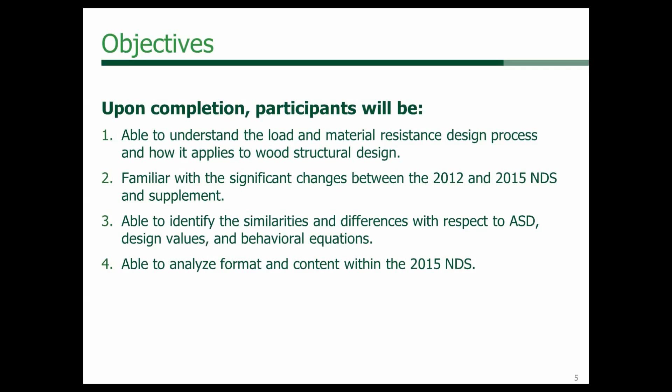Now, the learning objectives today are to be able to understand the load and resistance factor design process and how it applies to wood structural design. We'll become familiar with the changes between the 2012 and the 2015 NDS. And then we'll also look at identifying the similarities and differences with respect to ASD, allowable stress design values, and behavioral equations. And for those of you that aren't familiar with the overall format and content of the NDS, you'll become familiar with that. We'll go through chapter by chapter. And if you've used it before, maybe this will be a review for you, and it'll help you design a little easier with the NDS, becoming more familiar with where everything is.

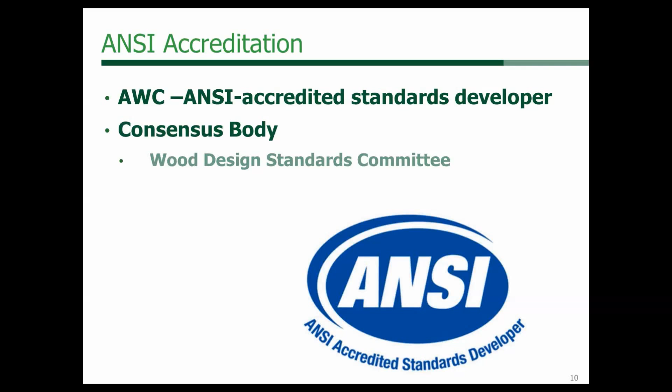The other thing I want to point out is this standard is developed through a standard consensus-based process, and our consensus body is the Wood Design Standards Committee. So this is a very rigorous process where it's not only the wood industry involved with developing the standards, but we have a cross-section of stakeholders that are also involved with the process of developing the standard.

Now looking at the overall format of the actual NDS and the changes from 2012 to 2015: the 2012 NDS is formatted such that chapters 1 through 3 cover general design criteria or general provisions for designing with wood, and then the product chapters—sawn lumber, I-joists, glue lams, structural composite lumber, oriented wood structural panels—are all in the product sections, which are in chapters 4 through 9. Connections are in 10 through 13 in the 2012, then 14 is shear walls and diaphragms, specific loading is in 15, and fire design is in chapter 16.

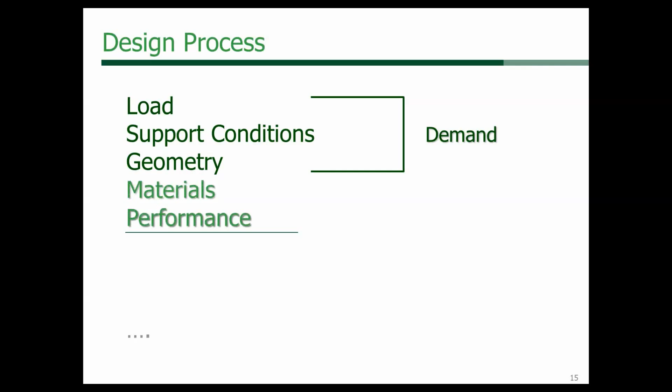How is the structure resisting those loads that are being applied? In the design process, when we look at the demand, we have load, support conditions, geometry, and those demands could be based on type of loads, the magnitude and placement of the loads in the system, and the resulting interaction of those loads. Then the capacity side includes geometry, materials, and performance—the material choice, the section geometry of what you're utilizing to resist those loads, and how the system behaves under those loads.

That would be the capacity side. Beyond that, you may also want to look at fire resistance, something that's becoming more and more prevalent in the U.S., where engineers are getting more involved with fire resistance. Then there's the economics of whether it's buildable or constructible. Some engineers may get involved with that, or designers, or the aesthetics. So those are the other aspects of the design process.

Now when we evaluate a structure, we look at it from two basic limit state concerns—how we evaluate whether or not this structure will meet our criteria. The two limit states are serviceability, performance, how it's going to perform in service, and safety against collapse or failure. We'll look at that in more detail in the next couple of slides.

Serviceability: both ASD and LRFD design look at serviceability, and they use unfactored loads. Both processes use unfactored loads, and we also use mean material strength values. One way of looking at it is serviceability.

So you have a floor and you're evaluating the serviceability of that floor. There are certain criteria under unfactored loads—you want to know, and you have a criteria, a certain deflection, L over 240 for that floor, or L over 360 for that floor. Beyond that, that's per code.

Beyond that, you may also want to look at what your feel for that building should be, whether or not you're going to get a bouncy floor, what the criteria from the owner is going to be, and whether it's going to be a high-end residential where you want a floor that's not bouncy. So there are even other parameters beyond that.

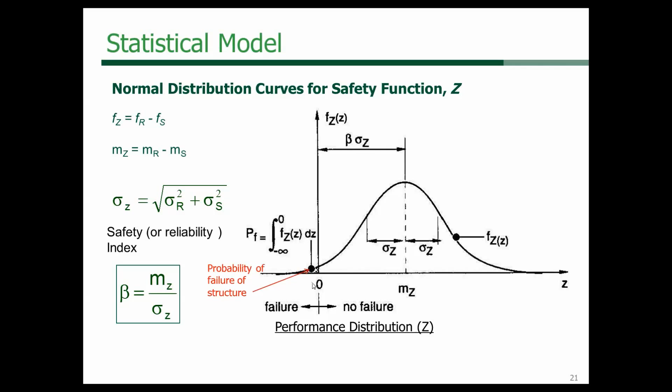So how does this apply to what we do as designers? That's the probability of failure of structure. We use this data, and the measurements that we had. From all of these resistance measurements, we use the 5th percentile of tested data and come up with our resistance for our structural wood members.

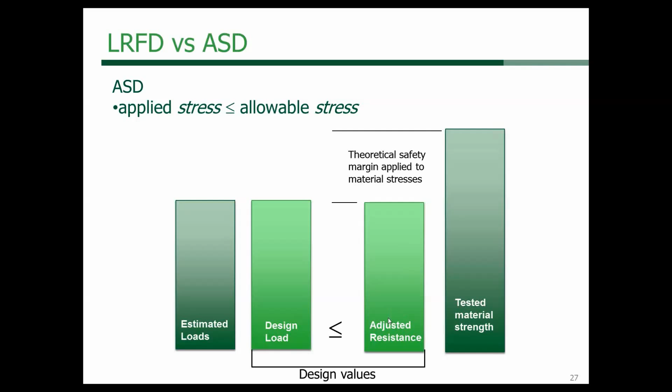When we compare allowable stress design to LRFD design, on the left side we have an estimated load, whatever load we're applying to the structure, and we use that for our design. Our loads that are applied are not factored up, and because of that, on the resistance side we have a high factor of safety. The strength of the materials are adjusted with a high factor of safety on the resistance side, and hopefully your design load is less than your adjusted resistance.

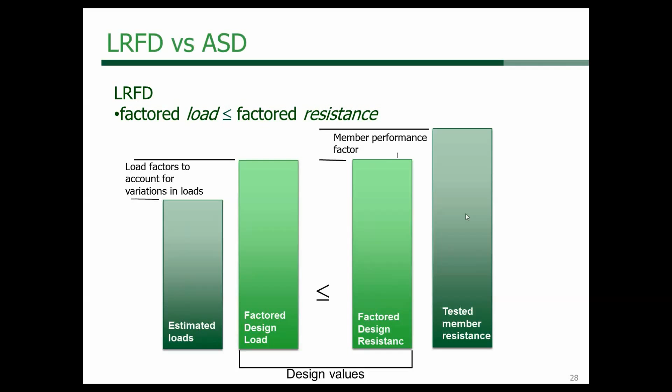Now on the LRFD design, we have similar equations with the demand on the left side and resistance on the right. On the demand side, we have estimated loads similar to allowable stress design, but we factored those loads based on research done, and in our case, in the 80s, we did research with ASCE to come up with our design values and factors. So we have factored loads, higher than the estimated or applied loads. On the resistance side, we now have a factored resistance, but because we know more about the load side, the difference between the tested member resistance and the factored design is less. So we have higher resistance.

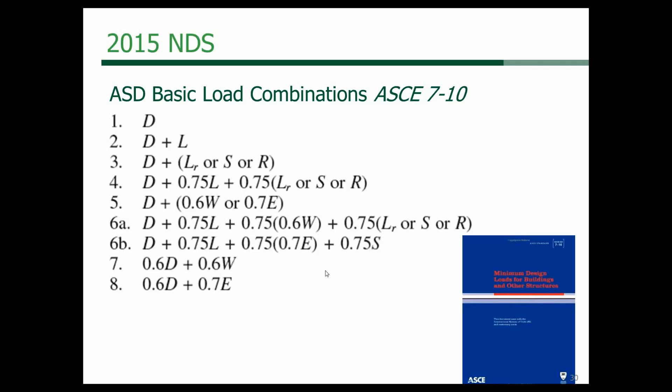Now, how does that apply to our designs? Under the 2015 NDS, similar to the 2012 NDS, we have adopted or referenced ASCE 7-10, so nothing changes there from 2012. For LRFD, we have the basic load combinations, very similar to all other materials designing using LRFD. On the ASD side, we also reference ASCE 7-10 for our load combinations, similar to what we've used in past years, although the snow loads have changed a little because the snow maps are now based on a strength design, and load combinations for both LRFD and ASD have been adjusted for that.

Now, if you're interested in finding out more about LRFD versus ASD and some efficiencies you can find in LRFD, we have a white paper freely downloadable from our website. I should warn you, though, it's based on ASCE 7-02. Hopefully it will be updated in the future, but it'll give you an overall idea, and it's also based on 2005 NDS, but it'll give you a sense of the load combinations that lead to efficiencies when looking at LRFD versus ASD.

One thing I want to point out is when you go to the document and you're designing for ASD or LRFD, there's some things you need to know. We go to the NDS supplement to get our reference design values. These give our resistance side of the equation, our capacities of our wood members. And when we go there, that document, the NDS supplement, was based on an ASD design.

So rather than having two documents, one for ASD and one for LRFD, we now have this conversion factor, which is KF. On the top, we go to our NDS for allowable stress design, and we go to the NDS supplement to get our reference design values, and then we multiply it times a load duration factor. If we're doing LRFD design, we again go to the NDS to get our reference design values, and we multiply it times a K factor, which is a format conversion factor, to get it into an LRFD design.

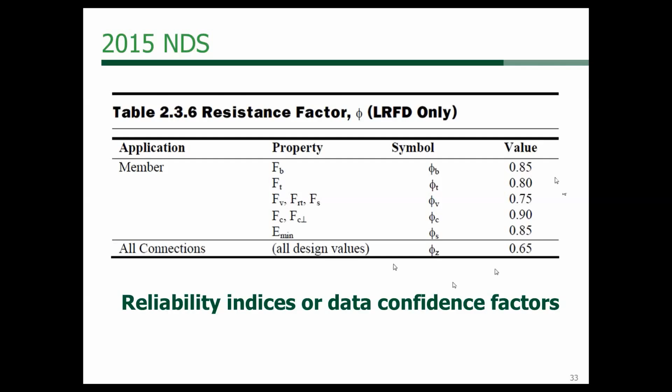So this is the resistance factor, the phi factor. It's for LRFD design, and I'll discuss this later on in the presentation, but we have a table in Chapter 2 that gives you the actual resistance factor. We have a time effect factor, which I'll mention later on and get into more depth for LRFD design. And then we have that format conversion factor, but I'll get more into it also later in the presentation.

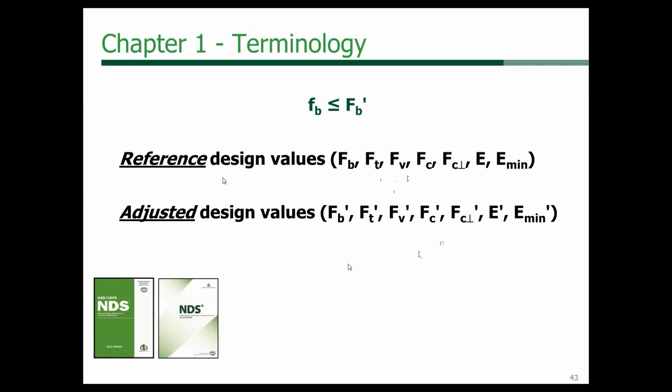Remember, we go to the supplement to get our reference design values, and once we apply all the applicable coefficients or factors, it is the adjusted design values that we check the demand against the capacity. So this is the capacity side of the equation, and moving forward throughout this presentation, or the NDS, we're going to be dealing with the resistance, or capacity side.

As I mentioned previously, Chapter 1 adopts or references ASCE 7-10 in both the 2012 and 2015 NDS, so no change there. Nothing else changed, and the reference minimum load standards are still referenced.

Now here's the charging language for utilizing wood using the NDS. You can see that cross-laminated timber is now specified in the NDS, and this is very important. Under the 2015, you won't have to use alternate means and methods for designing cross-laminated timber. Now it's referenced in the NDS.

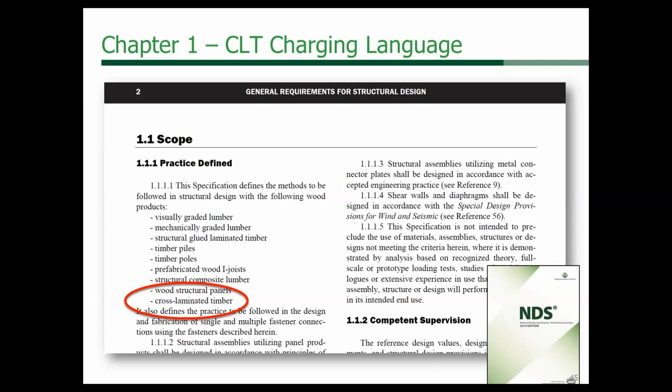And then, as I mentioned previously, about moving Chapter 14, which references the special design provisions for wind and seismic, we've moved it from Chapter 14, and it's now referenced in Chapter 1, if you go looking for it.

On to Chapter 2. Chapter 2 deals with design values for structural members, and this is where we get into the applicable factors related to all wood structural members.

This section deals only with LRFD design, where we're dealing with the resistance factor mentioned previously, and then the conversion factor, which is for converting the supplement values, the reference design values in the supplement, to an LRFD design.

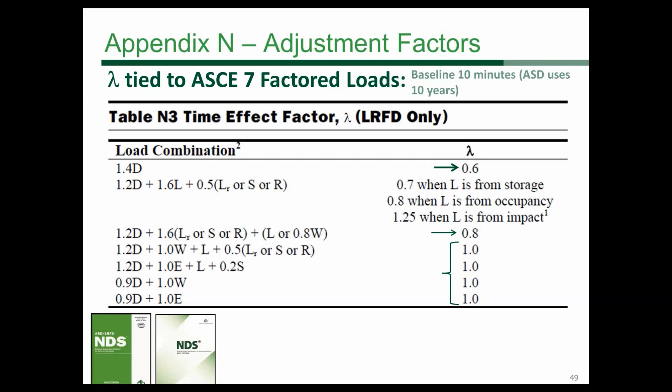Within Chapter 2, we direct the designer to Appendix N to get the adjustments for time effect, similar to LRFD. The difference is that for LRFD design, it's based on a 10-minute baseline, whereas ASD is based on a 10-year baseline. So you can see there's a bit of a difference in the actual factor.

For short-term loading, we're at 1.0 - that's the 10-minute baseline. When we get into long-term loading, it's 0.8. And for permanent loadings, we're at 0.6.

In Chapter 2, for ASD, we have a baseline of 10 years. So C sub D, the load duration factor for permanent dead loads, is 0.90. For 10 years, occupancy live load is 1.0. For 2 months, snow load is 1.15. For 7 days, construction loads are 1.25. Short-term loading, which is wind and earthquake loads, was previously 1.0 for LRFD, whereas for ASD design it's 1.6. And then we have an impact load duration coefficient of 2.0 for impact load.

Also, with all wood structures, or any structure, we want to understand what is the end use or in-service use of that building. With that, we can understand what applicable loads are applied to the wood members when we're doing our design.

One of those adjustment factors has to do with temperature. Wood, when exposed for a sustained period of time to high temperatures above 100 degrees, requires a temperature factor to be applied to that design. We often get the question: what happens if you're in an attic where you get a diurnal effect, with heating during the day and cooling at night? The temperature factor would not apply unless, at night, it's still over 100 degrees, but typically you don't have a sustained period of time exposed to that over-100-degree temperature. It's in cooling tower conditions where you may have to apply this factor.

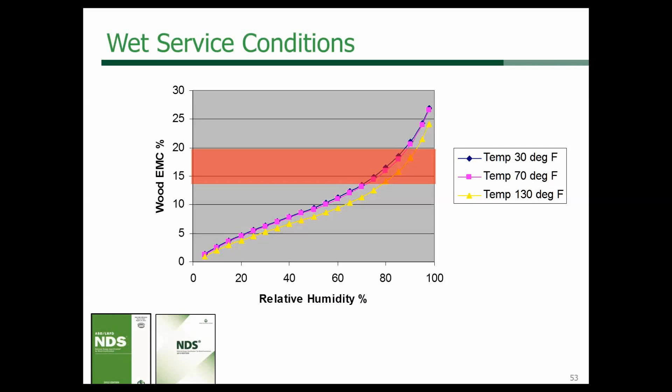Now this is the actual wet service factor that's applied, and as I mentioned previously, when dealing with compression perpendicular to grain, we take a huge reduction of 33% because of it being above 19% moisture content for its exposure when in service.

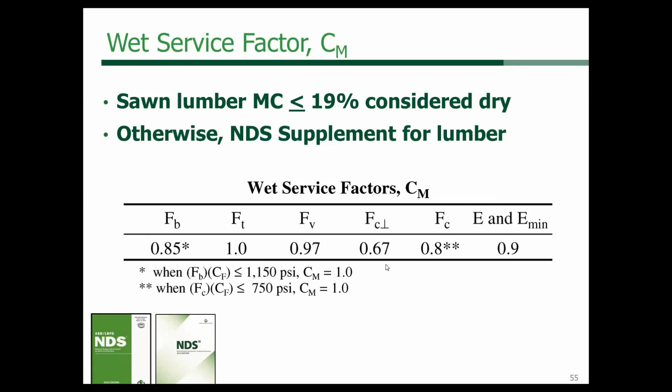Also in Chapter 2, there's the inclusion of cross-laminated timber in the language for the adjustment factors and for the reference design values. Since cross-laminated timber is a proprietary member, you'll need to see the manufacturer to get the actual reference design values, but all the applicable factors we mentioned will still apply to those values.

Okay, now on to Chapter 3, where we get into the behavioral equations. This is the design provisions and equations by which we evaluate the wood members. Similar to other materials, we have shear, bending, deflection, and this is an example of ASD versus LRFD.

We mentioned this previously about the adjustment factors. ASD is just that: you get your reference design value, bending for example, and multiply it times the load duration factor and all the adjustment factors that apply. With LRFD, we have the reference design values multiplied times the conversion, then the resistance, the time effect factor, and all the adjustment factors.

For the behavioral equations, there are some things I want to point out that have changed within the past two versions, having to do with stability, the beam stability factor C sub L. When we changed over to a combined LRFD to ASD format, we had to introduce E minimum into the critical buckling design factor, and E minimum takes into account the 5th percentile modulus of elasticity value, so that's relatively new compared to the other versions.

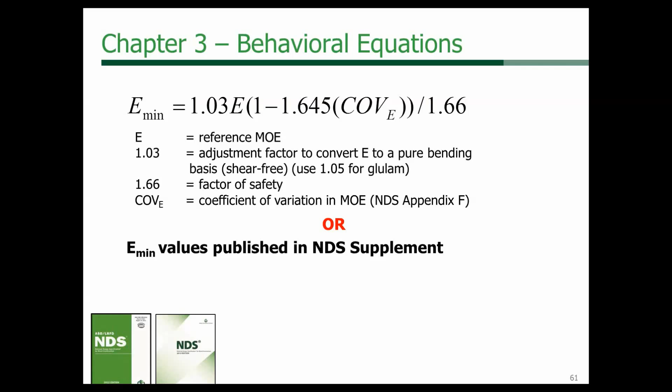The reference modulus of elasticity for beams and column stability, E minimum, is represented here, which represents an approximate 5% lower exclusion value on pure modulus of elasticity, divided by a 1.66 factor. The factor of safety can be calculated using that equation.

The behavioral equations for tension follow a similar format, ASD versus LRFD. One thing to be aware of with tension perpendicular to grain: it is not recommended to apply loads in this situation. There are some minimum recommendations in the NDS related to applying loads here, but it's not recommended. Some initiators of tension perpendicular to grain are notches, moment connections, or hanging loads. The commentary provides additional information in the 2012 version, not yet in the 2015. This is the Achilles heel of wood members, tension perpendicular to grain, so we want to try and avoid it as much as possible.

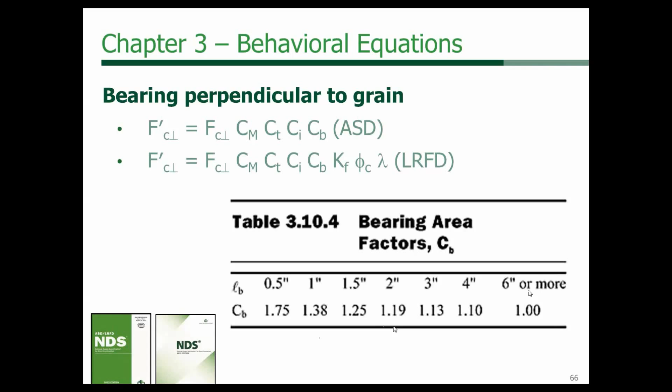We also have applicable factors related to bearing area factors, depending on if you're checking your studs, for example, bearing on a sill plate, this factor would apply. You see some efficiencies when you have LB, the bearing length, narrower. You get up to a 1.75 increase in your bearing factor, all the way down to 1.0.

Also, for the deflection of actual members, if we're dealing with long-term loading or creep, you would see a new factor related to cross-laminated timber. This is a time-dependent factor which deals with the time-dependent deformations of creep related to cross-laminated timber. The factor is 2 because it's associated specifically with dry conditions. If you have something other than that, you can't use this factor. It's consistent with the 2.0 factor used for wood structural panels, similar to dry service use.

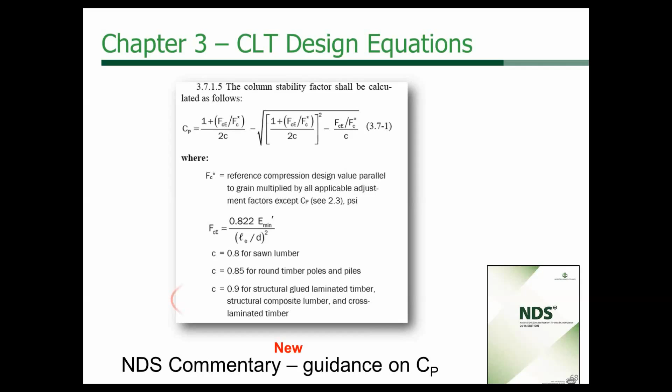Also, you should look at the commentary related to the column stability factor, C sub P, which you see the equation there. In that column stability factor, we have a new factor related to cross-laminated timber, similar to what was there for glue-laminated beams. We now include cross-laminated timber into that. But it's recommended that when the NDS is developed with a commentary, you make sure you look at the commentary to ensure you're using that factor correctly.

Okay, now another poll. All right, here we go. E minimum is used for buckling calculations for bending members and compression members. Is that true or false?

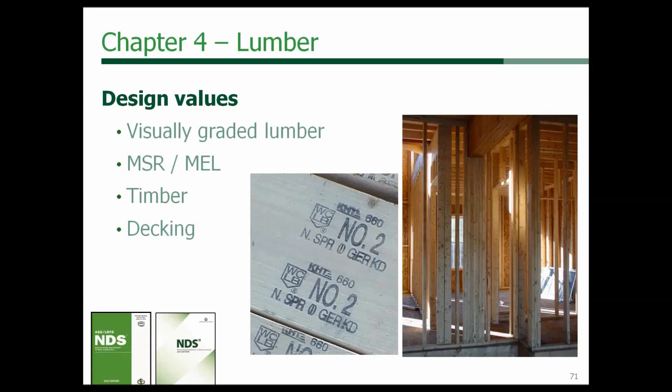Toward the end of this section, we'll get to the new product chapter on cross-laminated timber, which is probably what most of you are here for today. Chapter 4 deals with sawn lumber, and in that chapter we cover visually graded lumber, machine stress rated and machine evaluated lumber, heavy timbers, which are 5x5 and larger materials, and timber decking, which are 2x materials, not the 5/4 inch decking that has a span rated capacity, but the 2x material used in flatwise orientation as decking.

So, for example, for a bending design value F sub B that you would get out of the NDS supplement for lumber, you have a base design value of, say, 1,000 psi. That would then be adjusted by the load duration factor depending on the loading condition, a wet service factor if used in an exterior application, possibly a temperature factor, if it's an unsupported beam, a beam stability factor. The size factor would be applied for 2x4 up to 2x10 sizes. The baseline values are based on 2x12 sizes. So those are some of the adjustments that you'll see that are common to a lot of different materials in the standard.

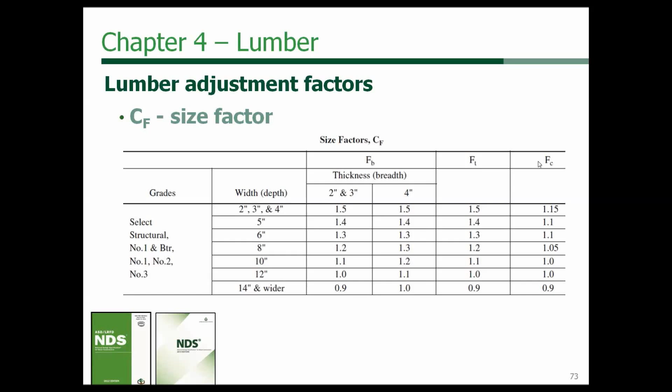I mentioned the size adjustment factor, and you can see here the cursor for a 2x12, the baseline of 1, and then adjusting up based on the size model that's been developed through the ASTM standard. Note that that also applies to tension and compression values as well, not just bending values.

If you're out on the West Coast or Northeast, maybe into Canada, you might be familiar with incising lumber to have the chemicals that are used to treat lumber penetrate to the depths required by the standards developed by the American Wood Protection Association, AWPA. When those incisions are cut into the edges of timbers or lumber, they use these small razor incisors to do that. It damages wood fibers in the surface of the lumber. So when we damage those wood fibers, these adjustments, called the incising factor, are necessary to make sure that you account for that reduced section, if you will, in the wood member. And that reduces the strength and stiffness properties except for compression perp, which is a bearing property, so that makes sense that that would be a factor of 1.

The repetitive member factor that we mentioned, the C sub R, is prescriptively set at 15% increase on bending design values for 2 to 4 inch lumber, if you're less than 24 inches on center, and that also applies to members that are in contact, so if you have a built-up member, it would apply as well. 3 or more of those with some sort of load distributing element. Load distributing elements can be gypsum, plywood, or nails if you have a built-up member where you could get that increase. It's a pretty common factor, pretty well known, but I mention it here because we're going to contrast it a little bit later on when we look at structural composite lumber.

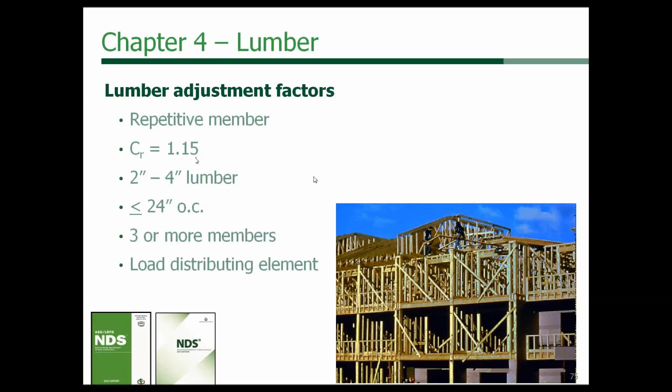We get to Chapter 5, that's for structural glued laminated timber. Again, you see the table for glue lam, comparable to what we showed for structural lumber, and the adjustment factors that apply for those various properties of structural glued laminated timber.

There's a footnote here that talks about the beam stability factor and the volume factor. We'll cover that here. The volume factor is a similar approach to the size factor that's used for sawn lumber that we talked about a little bit earlier, but it also, in addition to accounting for the depth, accounts for the width and length of the glued laminated timber product as well. And so that's called the volume factor.

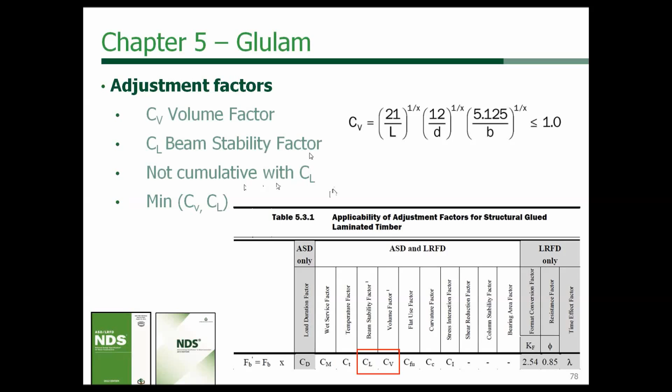The beam stability factor is calculated according to the equation that Michelle showed earlier in Chapter 3, and those are not cumulative. So you need to calculate both in your design process and then use the minimum of those two factors in the design process.

Round timber poles and piles are covered in Chapter 6. Poles are primarily used in post-frame construction. The large end of the pole goes into the ground for pole design. Piles are typically driven into the ground for foundations, and in that case, since they're driven, the narrow end of the pile goes into the ground first.

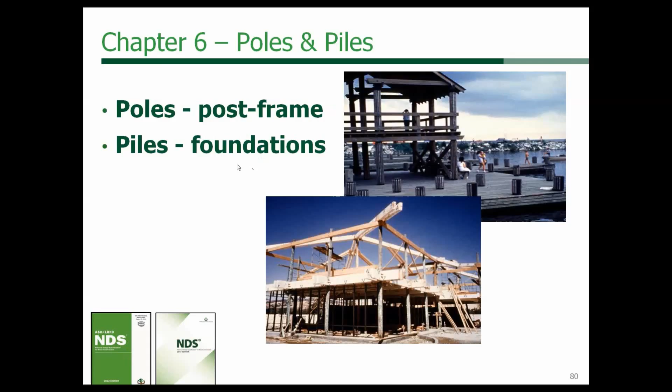And in the last go-round, 2012 NDS, we moved the design values for poles and piles to the NDS supplement. So if you're looking in Chapter 6 for those design values and they're not there, turn to the supplement. We'll talk a little bit about that closer to the end of the presentation today, but there's where you'll find the design values for poles and piles in the NDS supplement.

Again, a table similar to what you've seen in the NDS for lumber and glulam lays out the adjustment factors, and some of these you see are very specific to poles and piles. A critical section factor and a load sharing factor are unique to poles and piles. A condition treatment factor, C sub CT, so be aware that those are unique to that product, and that's why they only show up in this particular product chapter, as opposed to load duration or temperature factors that are pretty much uniform across all wood products.

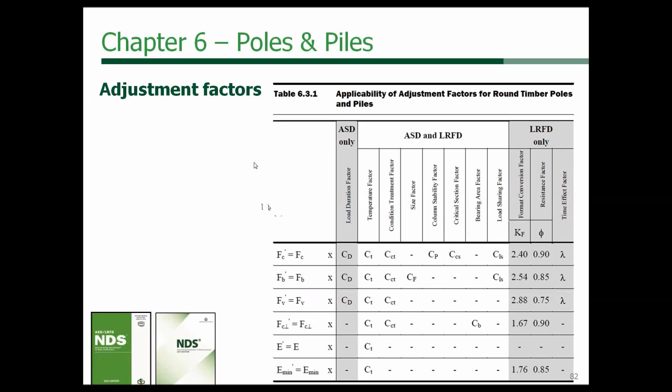When we get to Chapter 7 for prefabricated wood I-joists, I-joists are proprietary products, and the design values are tabulated as moment, shear and stiffness. Those values are incorporated in evaluation reports, and so they contain proprietary design values and therefore are not tabulated in the NDS supplement. So there are questions about whether those would eventually be incorporated into the NDS or NDS supplement in a more prescriptive way, and until the manufacturers decide to develop generic or commodity design values for those products, those remain proprietary, and you have to go to the evaluation report of the manufacturer to get those design properties.

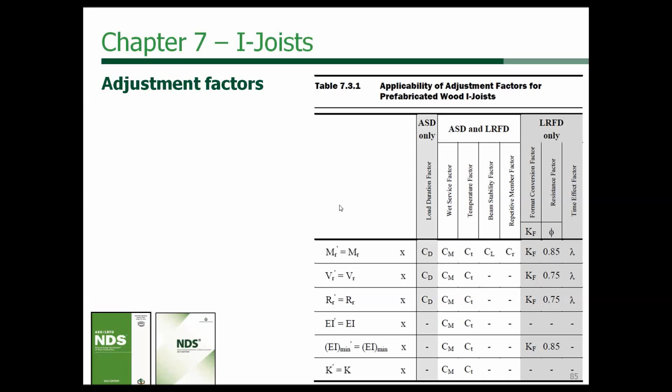But once you have those design properties, you would look at a table like this, and there's some design provisions in the NDS that show the application of the adjustment factors, load duration, wet service, temperature factors to those products. But again, look carefully at the evaluation reports, because those may have overrides that are unique to those specific products.

In this case, we're taking wood fibers and engineering out characteristics like knots and wane that would occur in lumber or machine evaluated lumber products, or even glulam that's made up of lumber. So the coefficient of variation for those products tends to be a little greater in lumber, much tighter with these other products, and you can take advantage of that, and the manufacturers are taking advantage of that in the design process for those products.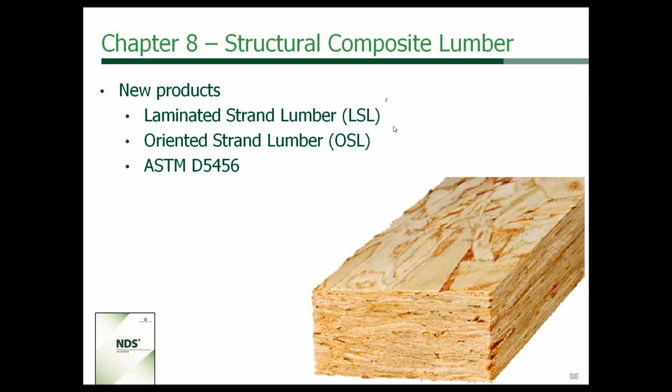Here's something new to Chapter 8 in the 2015 NDS, and that's the introduction of two new products, not new to the industry, but new to the NDS. There are products called laminated strand lumber, or LSL, and oriented strand lumber, or OSL, described in the ASTM standard D5456. These have now been incorporated, and they're all part of the family called structural composite lumber, which also includes, since the 2012 NDS and now in 2015, laminated veneer lumber and parallel strand lumber, PSL. So LVL, PSL, LSL, OSL, all products covered in Chapter 8 of the NDS now.

I mentioned the volume factor earlier for glulam, and mentioned before that for glulam that volume factor is not cumulative with the lateral stability factor C sub L. That's also true for structural composite lumber if the volume factor calculated is less than or equal to 1. But there are cases where you can calculate a volume factor greater than 1, and in that case for structural composite lumber, it is cumulative with that lateral stability factor C sub L. So there is a distinction here with structural composite lumber as opposed to glued laminated timber that you should be aware of in the design process.

Another slight difference that we typically point out: for the repetitive member factor for lumber, it's 1.15, and for structural composite lumber you can use that repetitive member factor, but it's only a 4% increase. That kind of goes back to what we looked at earlier, the graph showing the tighter coefficient of variation for these products. Since there is a tighter coefficient of variation, a lot of the strength properties are going to be much higher, so we're not going to be taking as large a factor or increase on the bending values because of that.

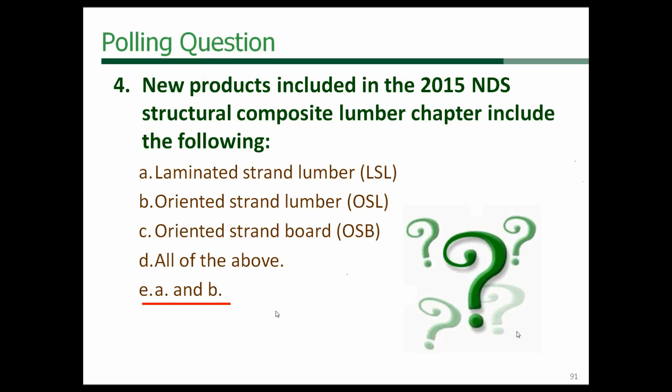The approach is just a little bit different from what you see of other products, and the reason I point that out is because when we get to cross-laminated timber in a little bit, you're going to see some similarities in how we approach design properties for cross-laminated timber.

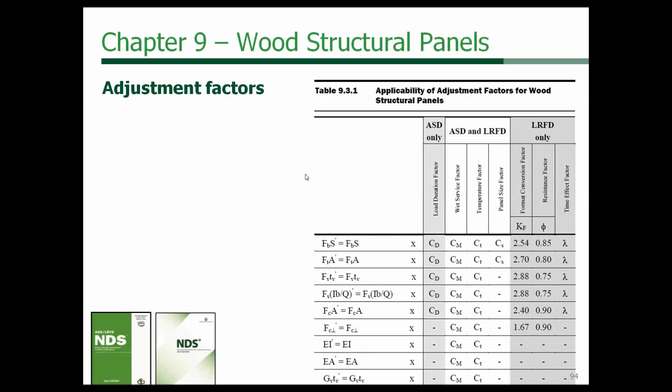You'll see table 9.3.1 looks like this, and again the adjustment factors that apply to bending include load duration, wet service, temperature, and panel size factors. Those factors and their application are comparable to what we see for other products, but some are unique to wood structural panels.

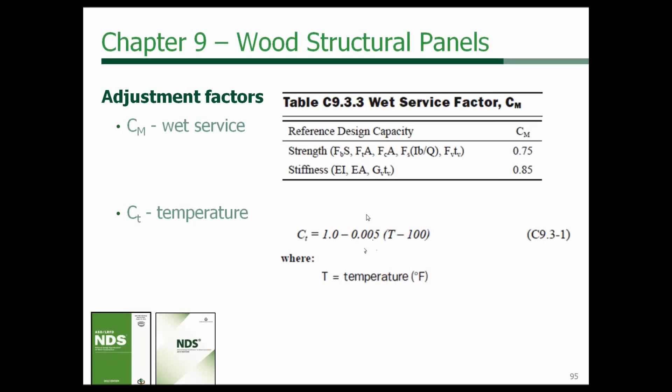I want to point out the wet service factor on some of the strength properties, C sub m of 0.75, and stiffness of 0.85, so that's a little bit different than what you see for lumber and some of the other products. The temperature factor is based on an equation rather than a table that we have for other products, so be aware of those nuances for these very specific products.

So now we're at Chapter 10 of the 2015 NDS, and if you've downloaded your free view-only copy or purchased a copy that you can print or make notes in, you'll notice that we have a new Chapter 10. This is going to take a little getting used to. It's a challenge for me as well because I'm used to going to Chapter 10 and seeing connection design. So we'll all kind of learn this one together, but the new chapter on cross-laminated timber is Chapter 10.

Since this is a new program and we're flipping along pretty quickly, I'll probably jump over into a PDF here in a second to take a look at that. But the provisions we lay out here are again very similar to what you'll see for panel design. Notice the ANSI APA standard, the product standard for manufacturers to use in manufacturing of cross-laminated timbers, and that's referenced in both the NDS and the 2015 IBC as well. So you've got the code references for cross-laminated timber.

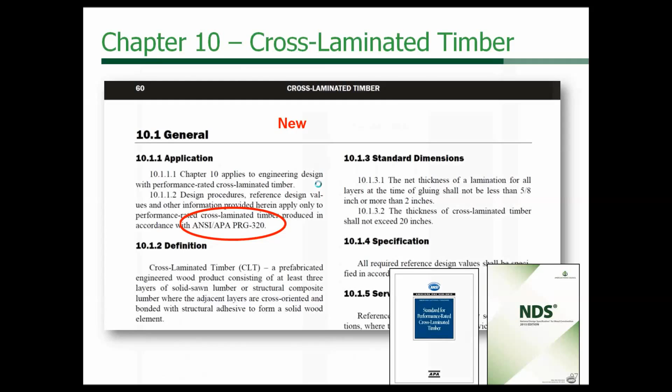So before I jump away from there, let me head over to the PDF that I had opened here, and let me pull that up, and we'll take a look at the PDF and see if we can walk through this a little bit in more detail. Kind of waiting for the screen to catch up—I can see it's lagging a little bit, so let me give that a second.

I mentioned the ANSI APA standard, so I'll highlight that. We've got a definition then in 10.1.2 for cross-laminated timber. It's going to consist of at least 3 layers of solid sawn lumber, and the adjacent layers are going to be cross-oriented and bonded with a structural adhesive. That's how it's defined in 10.1.2.

Notice here in the dimensions that products can be, or the individual laminations can be, as narrow as 5/8 of an inch up to 2 inches, but the max is a 20-inch thickness. And then we mentioned the design values coming from the manufacturer.

Let me see if I can adjust this a little bit so I can see my dashboard, so I'm seeing a little bit better what you folks are seeing out in the audience. Notice that the moisture content is assumed to be 16%, again comparable to some of the other engineered wood products that are used out there, and if you're going to use it in a higher moisture service condition, that has to be specifically permitted by the CLT manufacturer.

So again, as a proprietary product, the cross-laminated timber design values are going to have to come from a code evaluation report.

Again, you see down here in 10.3.1, those design properties are shown very similar to what we see for structural panels. The load duration factor applies except for stiffness, rolling shear, and compression perpendicular to grain. So again, comparable to other engineered wood products, we're not going to apply the load duration factor to stiffness, rolling shear, or compression perp.

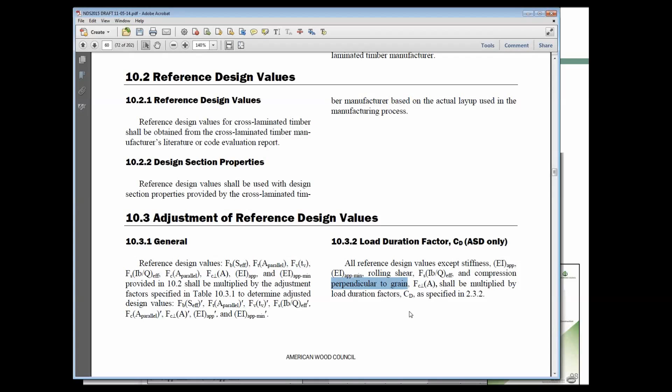So we've seen the adjustment factor table already. Let's jump down here a little bit.

Again, that wet service factor, you need to get specific permission from the manufacturer to use these products in wet service applications. The temperature factor is comparable to lumber up to 150 degrees, and those would be coming from the manufacturer.

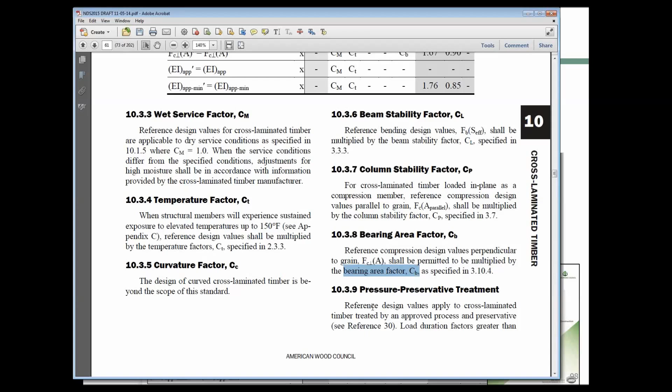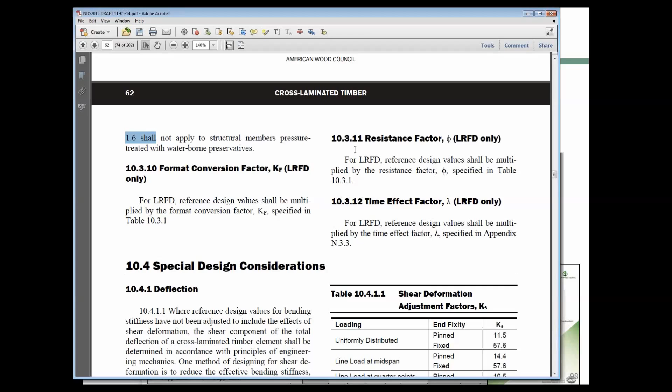Similar to other products, the bearing area factor can apply to compression perpendicular to grain. You could preservatively treat these products, depending on the manufacturer's recommendations. In that case, similar provisions apply about the reference design values and not using a load duration factor greater than 1.6 for those products. Then application of the LRFD factors shown here as well in the remaining 3 sections.

One last consideration at the end of the chapter is designing for shear deformation. You can reduce the effective bending stiffness of the product, EI, by using this equation 10.4.1, and the adjustment factor K sub S, the shear deformation adjustment factor, is shown in table 10.4.1.1 over here on the right. So again, some additional guidance for design to account for shear deformation if that's not already accounted for in the design values for that product.

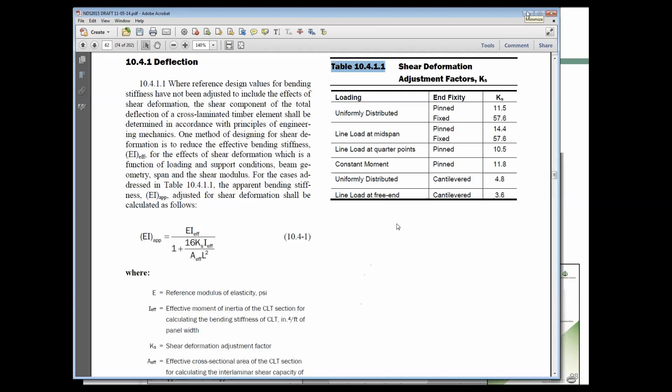So that's a thumbnail view of Chapter 10 in the NDS. We didn't go into a lot of detail here in the slides because, as a new program, we weren't exactly sure about timing. Since we're a little ahead in the presentation, we thought we'd take some time to work through some of those provisions.

Now we get to Chapter 11, and again, for those of you like me who are struggling to get used to the new format, what used to be Chapter 10 in the 2012 NDS is now Chapter 11 in the 2015, and that deals with mechanical connections.

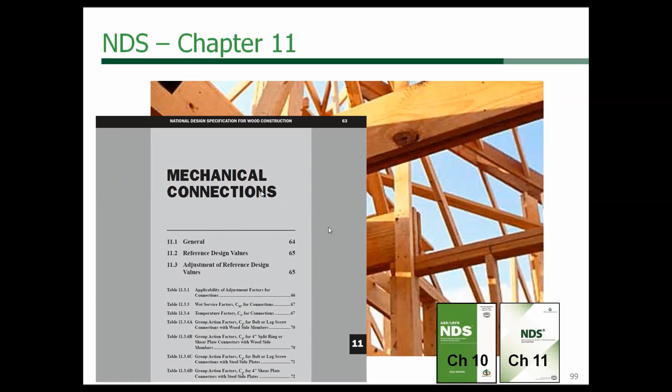This is sort of that catch-all chapter, has the same design table. Let me back up here. Now 11.3.1 shows application of the adjustment factors for different types of connections.

And so now Chapter 12 is going to be your dowel type connectors. Chapter 13 will be split rings and shear plates. And Chapter 14 will be timber rivets. So again, that's as much as anything going to be the toughest thing to get used to with the 2015 NDS. No significant changes here other than a new chapter designation.

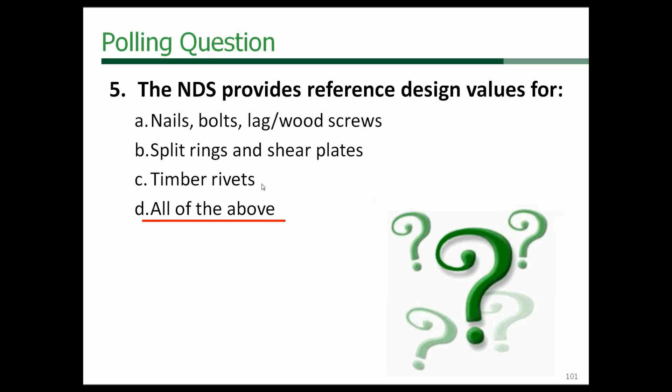And the real answer is, buddy? The real answer is D, all of the above. And so we do have design values for dowel type connections, split rings and shear plates, and timber rivets. We'll talk about each of those three in the next few slides.

Let's talk a little bit about the different yield modes and how those apply. Mode 1 is a bearing dominated yielding of the wood fibers.

So for single shear connections, you're going to have a large, maybe stiff dowel that is bearing and crushing the wood fibers in the main or the side member. Mode 2 is going to be very similar, where you've got fasteners rotating through. In these yield modes, 1 and 2, we've got pretty much crushing of the wood fiber, so the wood fiber is controlling the design of these elements. We don't have any yielding of the fastener.

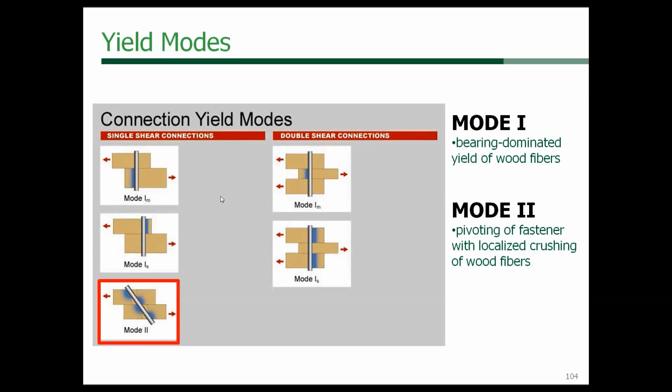Then we jump to mode 3. In mode 3, we begin to see yielding of the fasteners in addition to crushing of the wood fibers. Mode 3M, we get primarily crushing of the wood fibers in the main member, so probably a thinner main member or lower specific gravity in this member. 3S designates where the side member is yielding, so we've got a lower specific gravity in this side member or a thinner side member.

Here to begin to see that plastic hinge form in a mode 3S. Then mode 4 is where we really see the fastener doing all the work, so to speak, in shear walls, nailed type connections. You're going to see this type of yielding where the plastic hinge is forming on either side of the shear plane.

And so what you begin to see with these yield mode equations and the way they're set up is that you can actually design different yield modes into a fastener. If you want a very ductile type fastener to be used in wind or seismic applications, you can work through those equations to get to a mode 4. That then assures you that you've got the fastener yielding and doing all the work in that particular application.

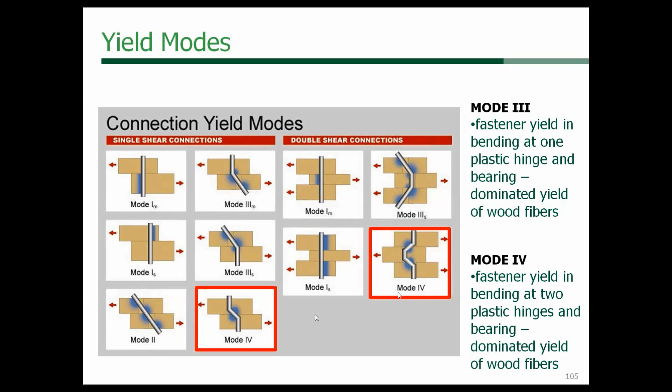I know the equations can get a little unwieldy, but we do have a calculator on our website, a connections calculator. It actually calculates all of these yield modes for the different types of fasteners and spits out all the different yield modes, so you can see what would actually control in the design process. If you haven't seen that yet, I encourage you to take a look on our website for the connection calculator, and you can use that tool for your design applications as well.

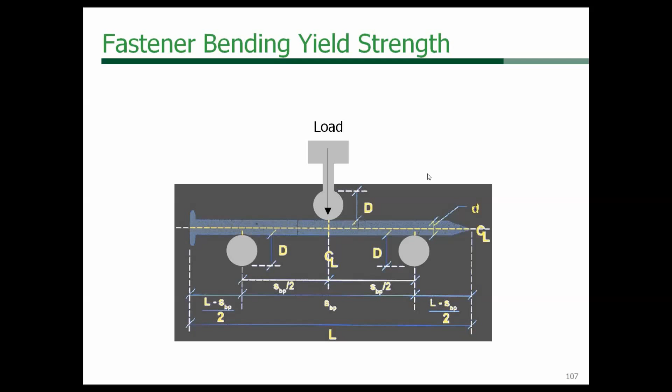So that brings us to some of the new provisions in Chapter 12, which are related specifically to CLT, cross-laminated timber. For those of you familiar with the NDS, you know that normally for end grain there is a factor for withdrawal of lag screws, the factor of 0.75.

So if you have a lag screw application in various wood products like lumber, and that lag screw is inserted in the end grain and loaded in withdrawal, the adjustment factor for that withdrawal value is 0.75.

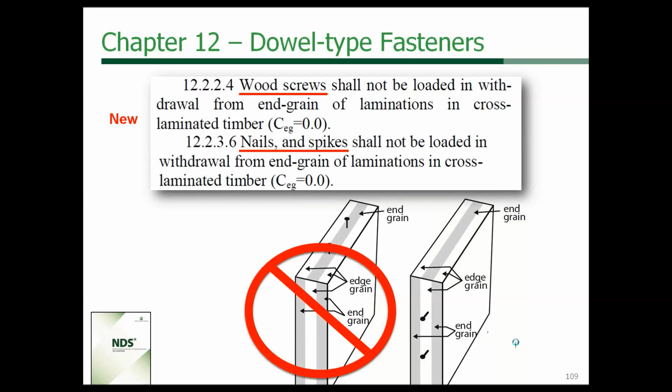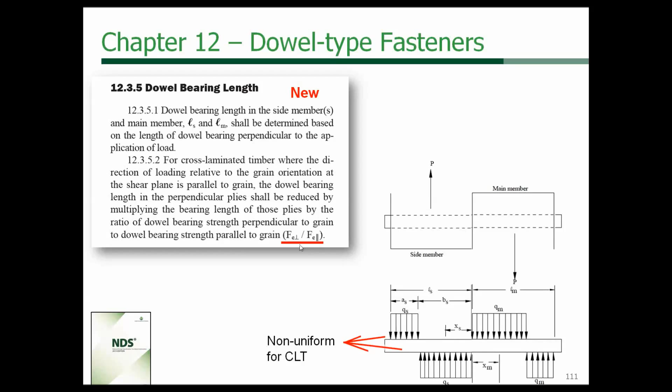If you look at our technical report 12, you see that there's non-uniform loading of fasteners covered there. We've kind of got that same situation here where we're one layer parallel to grain, one layer perpendicular to grain. So we're going to use this ratio of FE perp to FE parallel to adjust the length of those fasteners. That's kind of complicated to talk about, so let's look at an example. I think it'll make it a little bit clearer for what we're trying to accomplish here.

So let's say that we've got a bolted connection through a 3-ply CLT product. We've got a 1/2 inch bolt, and it's southern pine, so the specific gravity is 0.55.

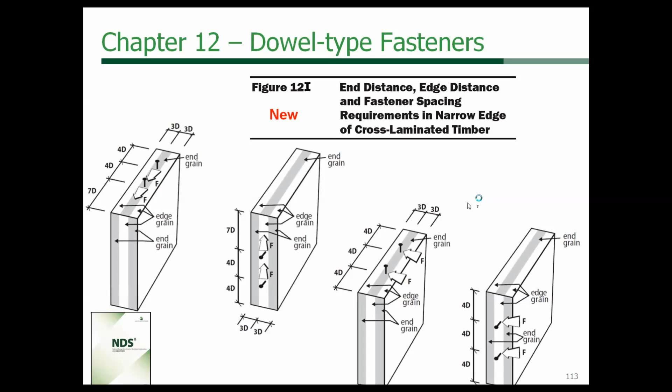The other thing we've built into Chapter 12 are some end distance, edge distance, and spacing requirements. If you look carefully at the diagrams and tables we provide, for parallel to end grain applications, we'll have some end and edge distance spacing requirements. For parallel to edge grain loading, we'll have end and edge distance and spacing requirements. Then for perpendicular to end grain and perpendicular to edge grain, we spell out the end and edge distance requirements for those. Designing for those products and paying attention to detailing is going to be pretty important, but if you're doing fastener design now, you're used to accommodating end and edge distances.

Let's get to the end grain factor, C sub EG. This is for our lateral design value, Z—we're not looking at withdrawal factors anymore, we're looking at the lateral factor Z. For the typical fastener less than 1/4 inch, that end grain factor is 0.67. So pretty much any end grain application, you're going to have an end grain factor of 0.67. But if the dowel type fasteners are greater than 1/4 inch and are laterally loaded in the narrow edge of CLT, we're also going to apply that end grain factor, regardless of grain orientation. Since we don't know where the end and edge grain will fall, to account for those reduced end and edge distances for larger diameter fasteners, we apply this simplified, conservative approach of using an end grain factor of 0.67 on any CLT edge.

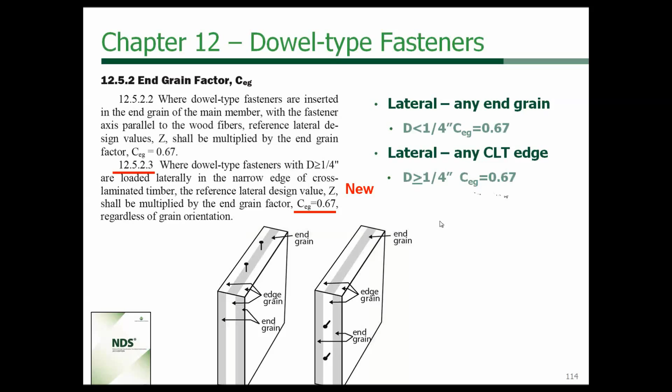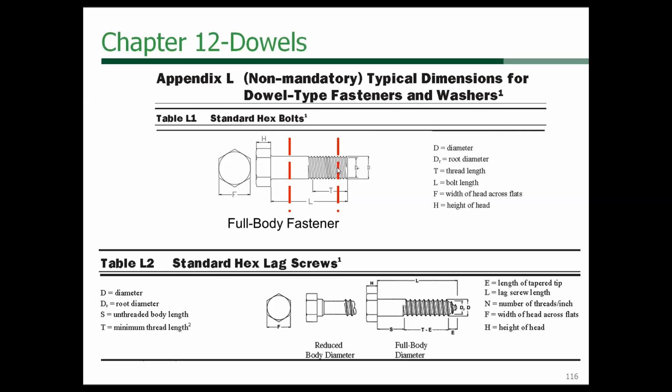This is not new, but just a refresher for dowel diameters—this changed in the 2012 version, so we come back and refresh it each time since folks still ask questions about it. For unthreaded full body diameter fasteners, we use diameter D for the design values, but D sub R for reduced body diameter fasteners and threaded fasteners. There's an exception: if you're not within a quarter of the full bearing length, you can use that full diameter D. The unthreaded diameter D is shown here on the left red dashed line, and the root diameter in the threads is shown on the right red dashed line—pretty comparable for lag screws as well. As long as your threads are sufficiently away from the shear plane, either in the main member here or here, you can use that full fastener diameter D. If you have fasteners that show up in the shear plane, you're going to use the root diameter D sub R in the design process.

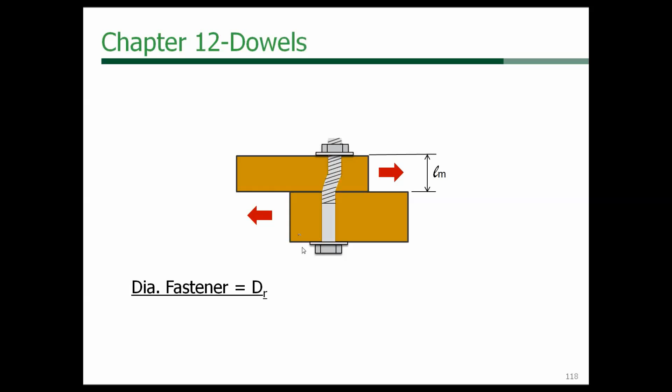This is just a reminder that we have a technical report, TR-12, used for analysis of gaps between members, various bending moment configurations, fasteners through hollow members like hollow steel tubes, and fasteners with tapered tips. That's a free download from the website that will allow you to take advantage of some of these applications and potentially get increases for the root if you end up with root diameters close to the shear plane.

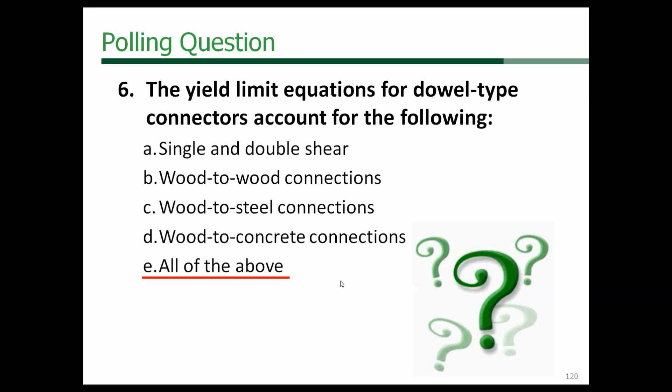83% say all of the above, 10% single and double shear, 6% wood to wood connections, and 1% wood to steel. Nobody says wood to concrete. And the real answer is E, all of the above. So congratulations to 83% of you who caught that and have a good understanding of what's going on in the NDS. All right, we can move along now.

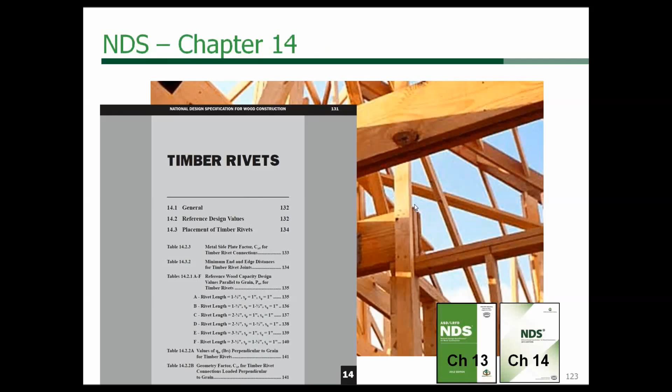We got through those provisions, primarily covering the new CLT provisions. Split rings and shear plates move to Chapter 13 - that's going to be your biggest stumbling block. Timber rivets are now in Chapter 14, so those end up in their new home as well. A lot of folks overlook that these timber rivets are very high capacity fasteners - you can get capacities of over 100 kips. So if you're looking for a real high capacity fastener, those tables are available.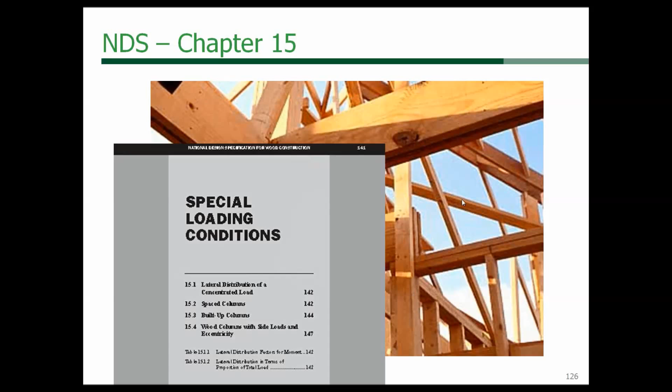Also, we'll reiterate what Michelle mentioned earlier. Chapter 14 used to cover shear walls and diaphragms. We still reference the special design provisions for wind and seismic, but those are referenced in Chapter 1 now. Chapter 15 is the same as it's always been for special loading conditions, where we get our built-up column provisions and eccentrically loaded column provisions. We jump into Chapter 16 for fire design.

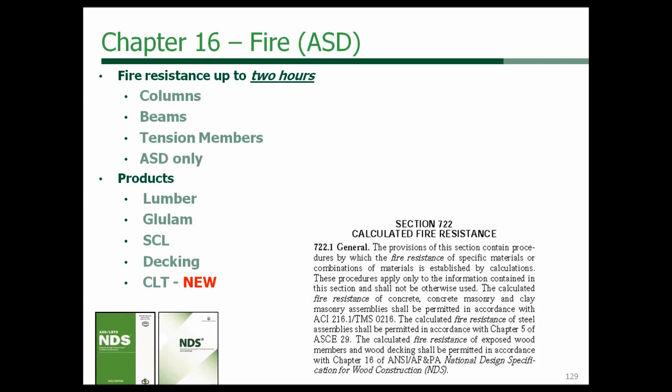There are a couple of new provisions here. This chapter applies to columns, beams, tension members. Right now it's allowable stress design only, but the products covered include lumber, glulam, structural composite lumber, decking, and CLT. I misspoke earlier when I said we were done with CLT, because we've incorporated provisions in the fire chapter for CLT design as well. This is now referenced specifically in the IBC - the 2015 IBC, section 722.1, references Chapter 16 of the NDS.

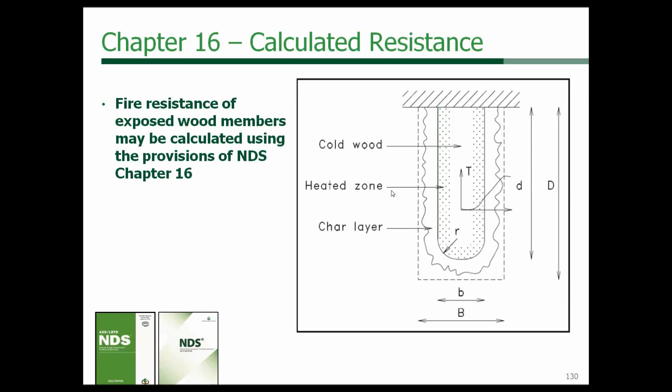This approach, in a nutshell, is based on the fact that as the outer layer of wood in a wood member burns away, it forms a char layer and protects the inner portion of that wood member. We account for that in the design process by assuming that outer layer is sacrificial, and we design a reduced cross-section based on a char rate of 1.5 inches per hour, which is what's assumed for wood. We've done tests and research, side-by-side comparisons, and you can see that wood holds up well in fire situations versus steel, and is actually a good product if used and designed properly.

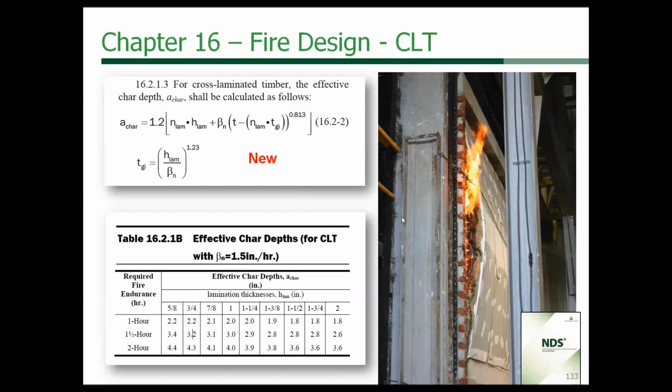But there is testing that was done specifically on cross-laminated timber, and with that testing we got this wall assembly to pass over a 3-hour test. So we now have a CLT wall assembly with a 3-hour fire endurance. We've got new provisions for calculating char rate and char depth in cross-laminated timber, so be aware of that. There's another Technical Report 10 that gives the background on a lot of that testing, including design examples.

The biggest change there is incorporation of floor assembly, lumber joist provisions. We're incorporating the CLT and some testing on structural composite lumber that was just finished up the end of last year, and that'll be out later this year in an update to Technical Report 10 as well.

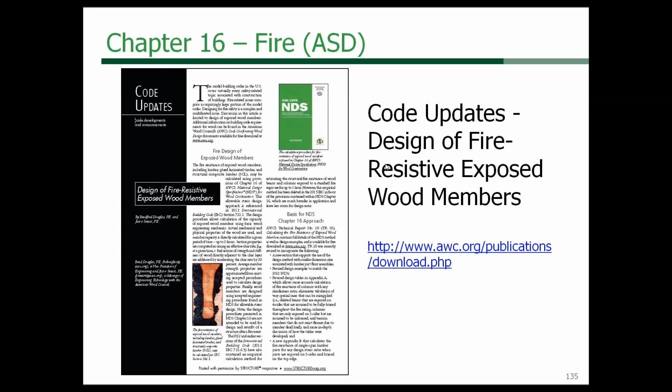And again, Marcy, I'm going to ask you to come back and let's do one more poll. Absolutely. So Chapter 16 of the 2015 NDS on fire design of exposed wood members does not apply to which of the following products? Lumber, glulam, SCL, CLT, or wood structural panels?

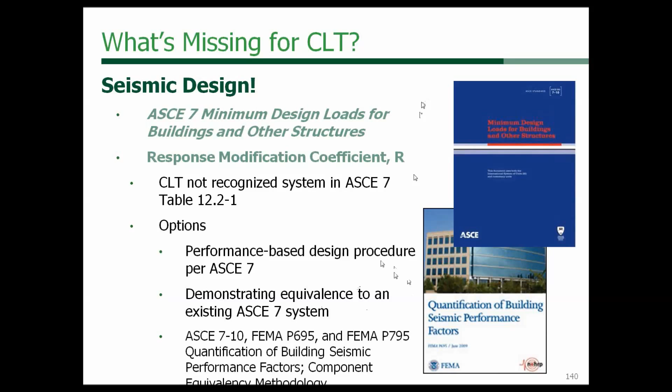What's missing? We don't have shear wall values yet, so we don't have a response modification coefficient. It's not yet recognized in ASCE 7, so we're working on that in the interim. Some of your options are to do a performance-based design procedure per ASCE 7, demonstrate equivalence to an existing ASCE 7 system, or do a FEMA P695 or P795 analysis on those products. We're actually working on all of those items at the moment, but if you are working with the manufacturer and building officials to try and come up with those values, that's how you'd want to approach it.

We mentioned this in December with the 2012 NDS. There was an addendum that outlined new Southern Pine design values that came into effect in 2013. Those are now incorporated completely into the 2015 NDS, and if you have any questions about information on those, there's some resources for you.

So hopefully you've seen the free view-only download on the website. If you haven't, Brian can send you a link for that in the chat box, and you can go get your view-only copy. If you want a printable version that is a little more unlocked that you can do things with, you've got to buy one. As soon as we finish up the commentary and some of the other resource documents, then we'll be printing copies of the wood design package, and those should be available sometime in the spring.

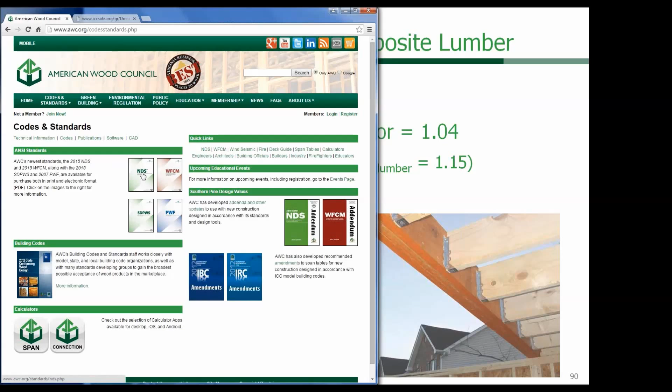Okay, so you go to our homepage, which is awc.org. You're going to see some icons like this. Click on the Codes and Standards icon, and that's going to show you a cover of the NDS right there. So you click on that.

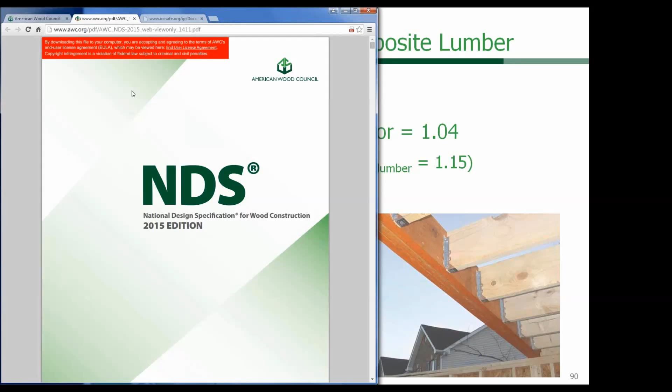This is going to get you to where you see all the different versions. So you go to the 2015 version, and that'll take you to this web page. As soon as you click on the cover, that should launch your PDF version that you can download. It says web view only in the title, so there's an end user license agreement you're agreeing to when you download this. It's not printable and has very limited commenting options, so it just allows you to view the provisions, but that's about it.

Okay, another question. We had quite a few questions about when the 2015 NDS is going to be adopted. That takes me to the ICC website, because I was looking at this question earlier. If you go to iccsafe.org, they have a state adoptions PDF file, and this one was just updated in January 2015. At this point, I don't see any states looking at the 2015 IBC. So the answer is that as states begin adopting the 2015 IBC, the 2015 NDS will get picked up by reference in the 2015 IBC.

Now, building officials all have the ability to approve newer standards, and most of them are likely to approve an ANSI consensus standard, even if it's not yet adopted in the code they're enforcing in their jurisdiction. So, for example, if they're enforcing a 2012 IBC, they are very likely, if you work with them, to accept under alternate methods and materials the 2015 NDS. So talk to your local building official, and I think you can probably work that out.

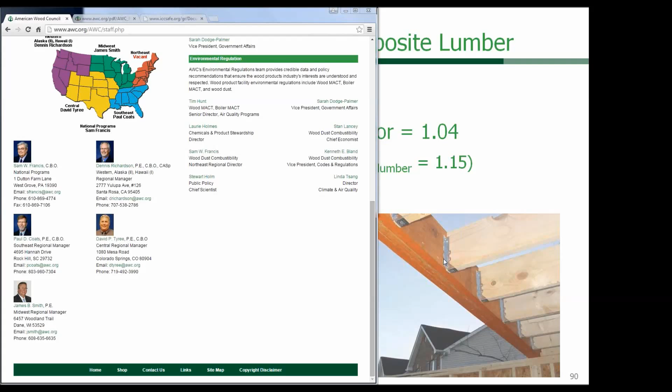Let's see, we have, what is the advantage of ASD versus LRFD, or vice versa, is one of the questions.

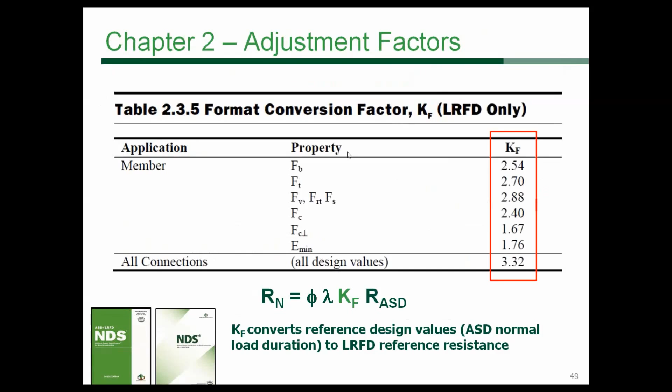Okay, so I'm going to try and jump back to one of the slides you talked about earlier in the presentation. The real advantage comes with multiple transient live loads. If you have applications, this is true independent of your material type, but if you have multiple transient live loads, let's say you've got a multi-story building where you've got multiple roof and floor loads coming down through the walls, the load factoring that occurs in a lot of cases will help reduce those loads to the extent that LRFD is advantageous regardless of the material you're using. So the first thing I would do is look at the load combinations of LRFD versus ASD to see where you get the advantage. You're probably going to have to do that anyway for your deflection calcs. You're going to need your ASD loads, and if you do your factored loads for LRFD, then you can compare to see which will give you an advantage in the design process.

I think we had talked about updating a paper that we have on our website at some point that shows some of those differences. We've done that for the 05 ASCE 7, so we're going to take a look at that for the 2010 version as well. Right.

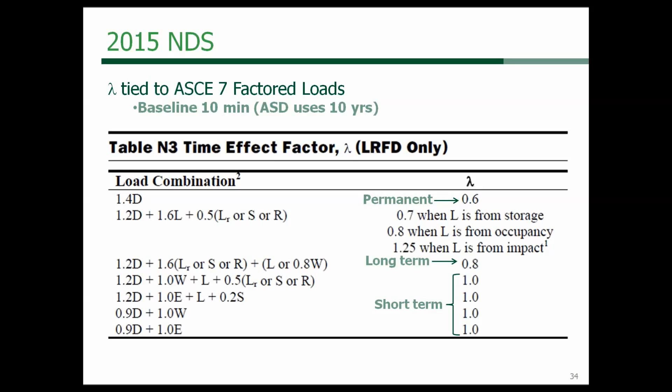Okay, we're now up at the hour I have. Do you have that too on the East Coast? Yes, we're top of the hour now.